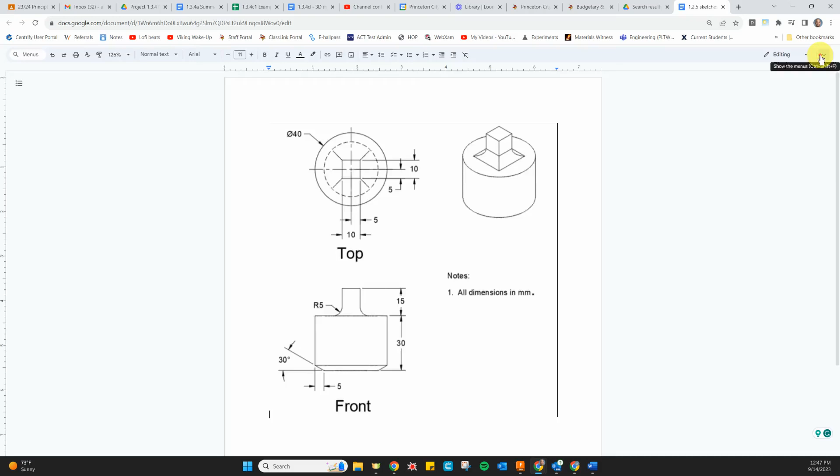Looking at this drawing, we're going to create this with Fusion 360. First, we'll sketch the circle portion and extrude it up a distance of 30 millimeters. So we're going to draw a circle of diameter 40 millimeters and extrude it up 30 millimeters. Let's get into it.

In Fusion 360, we're going to start a new sketch. I'm going to choose the tabletop because I'll be coming up with my extrusion. It really doesn't matter, you can do it from any dimension, but we're going to start in this flat dimension.

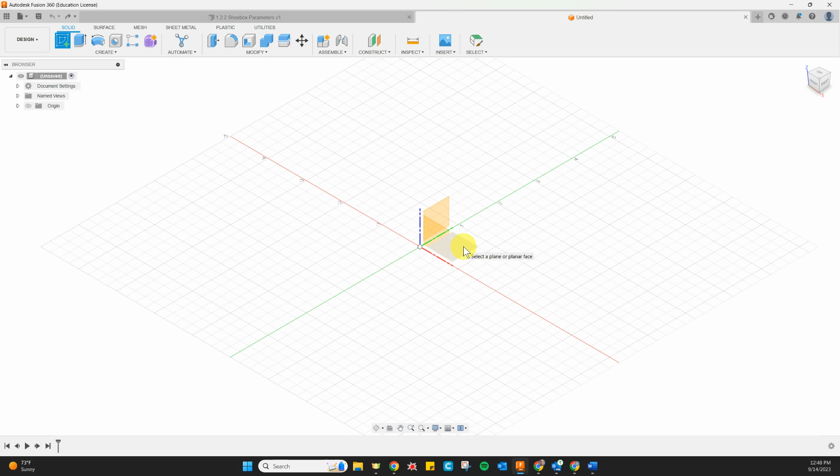We're going to start by making a center point circle. We click once in the center, move out, and I can specify a distance - oh look, it's got my units in inches right now. If you recall, our units are supposed to be in millimeters, so you might be telling yourself, I need to change the units.

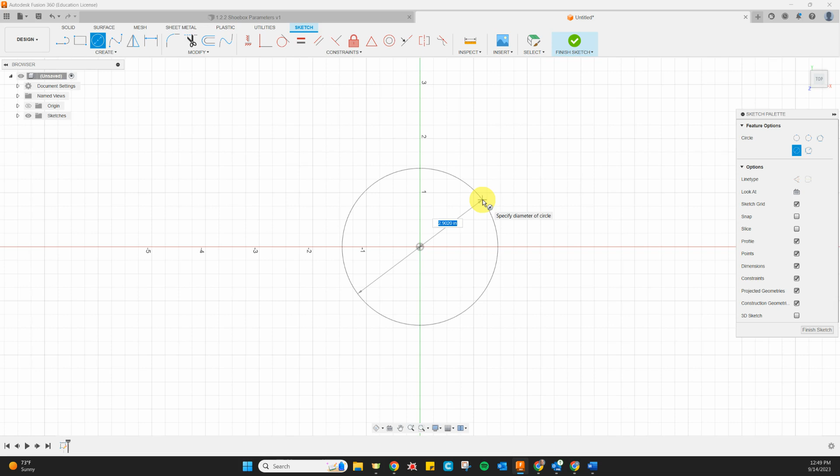To do that, I'm going over here to the document settings and expanding them. There it shows me my current units are, in fact, inches. We want to change that, don't we? We're going to change it from inches to millimeters. We don't want to set that as the default - I like inches being my normal default, so I'm going to say OK for now.

So now we're looking at it in millimeters. I'm going to create my circle once again, starting in the center, and come out a distance of 40 millimeters. That's what my drawing says.

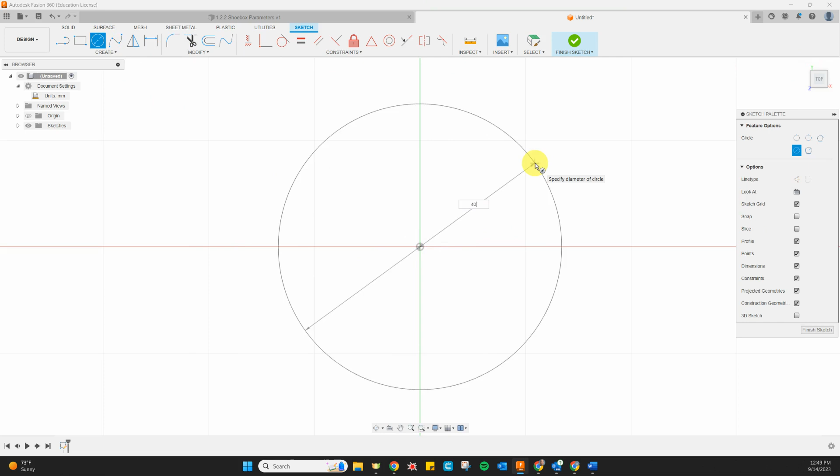Now you might be asking yourself, why are my blocks so big or so small, referring to the grid? Well, this is an adaptive grid - if I zoom in enough, it's not changing. You've got your grid settings down here, and right now my layout grid is not turned on. I'm not sure why it has a grid there, but that's okay, you can change all the grid settings right here.

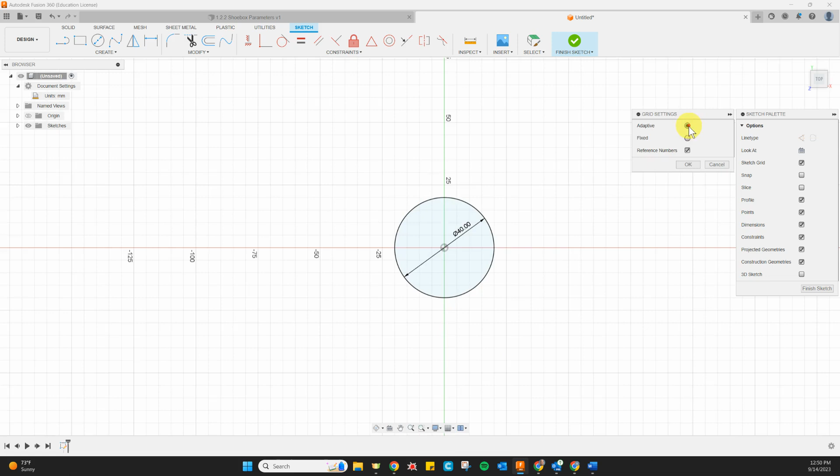There's the adaptive grid I was talking about - as you zoom in, they get smaller and smaller, and as you zoom out, they get larger and larger. So don't worry too much about that grid, it's just there to keep you oriented.

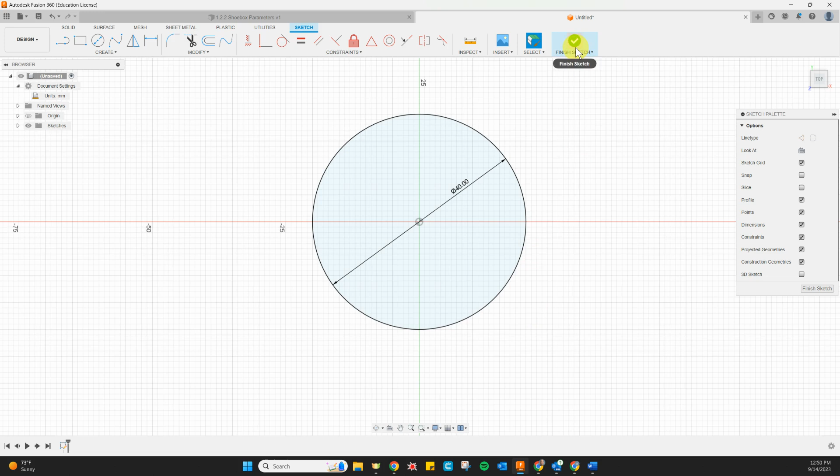I'll just cancel that. I really don't want my grid on right now, but I think you have to be in 3D mode to turn it off, so I'll go ahead and finish this sketch. Now I'm in 3D mode, and now I can go ahead and turn that grid off if I don't like it.

So now we've got our 40 millimeter circle, and we're ready to extrude it up. I think we set a distance of 30, so I'll go ahead and type in 30 there and press enter.

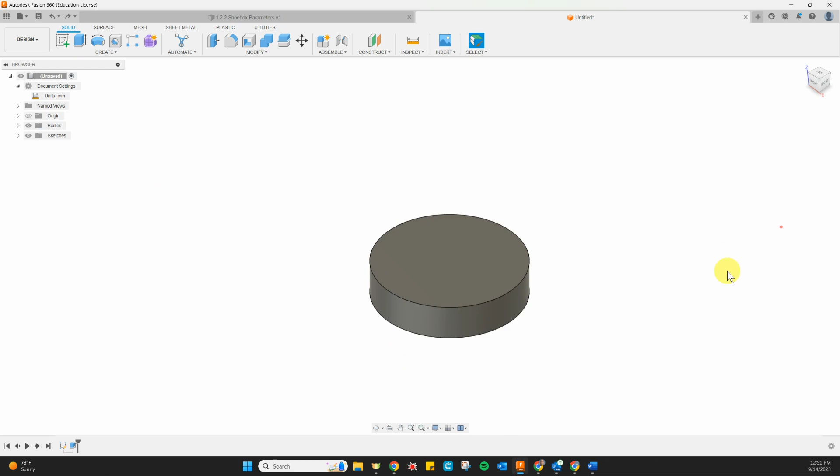Now let's say you did that and accidentally typed in the wrong number, or didn't type in a number at all. We can always go back and edit that extrusion right down here on our timeline. There's the original sketch - you can go in and fix it. If you meant for that to be 45 or 30, you could change it here.

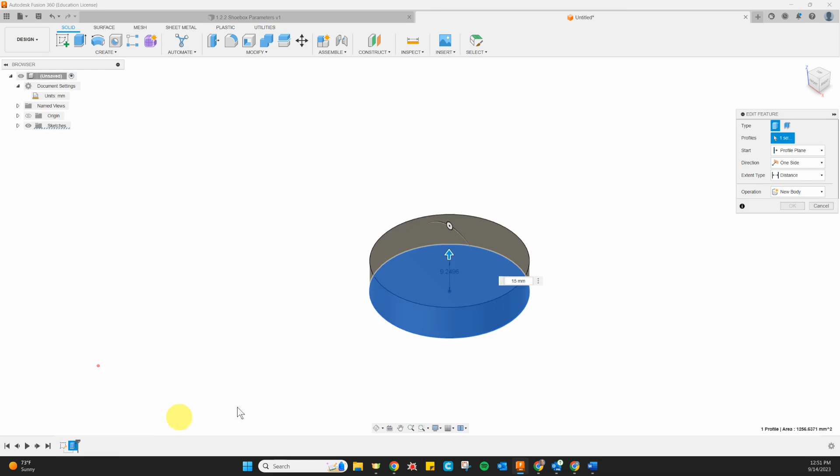We don't want to change ours. You can also change the depth of the extrusion by right-clicking on the timeline icon and hitting Edit Feature. We're going to drag it up, or just specify a height of 15. All right, so now we've got the base of our part.

It's done, almost. Now we're going to extrude this little cube up, straight up, and we're going to ignore the fact that it has some curved edges there - those are called fillets. We'll deal with those after we extrude the rectangle up.

Let's look at that rectangle. It is a square, and it does appear to be in the center. Over here, we can verify that the center of the square corresponds with the center of the outside circle. We know that because the distance from the edge of the square is 5 millimeters to the center, and the overall distance across the square is 10 millimeters tall and 10 millimeters wide. So therefore, it does line up with the center.

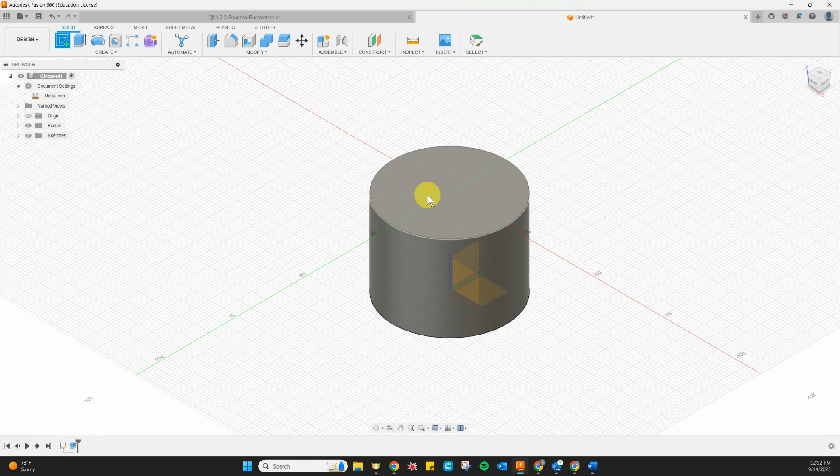Coming back to Fusion, we're going to sketch on the top. It's important here that you choose the top of the cylinder, not an origin plane back down on the tabletop. We're going to sketch on top of the cylinder. Select that as your drawing plane.

Now we'll use the rectangle tool. But here's the problem with this drawing tool: it wants you to do the two corners. There's a better tool for this job. If you look under the Create menu at Rectangles, which one of these options is better? Center rectangle, very good, thank you for that answer.

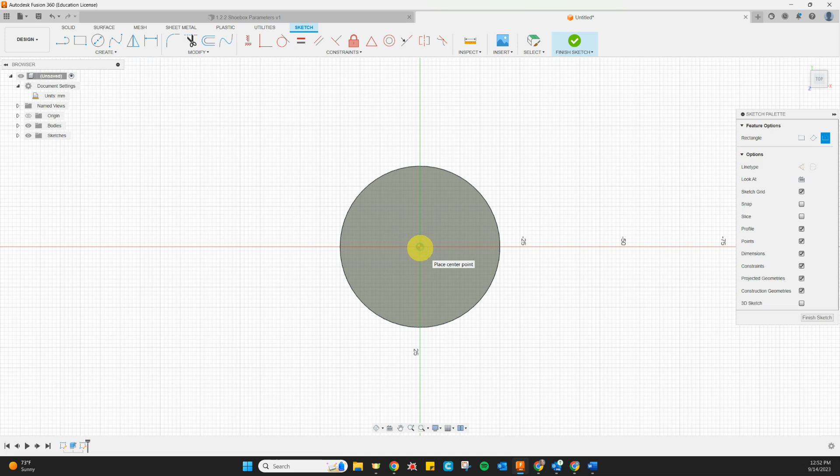We're going to choose the center rectangle, and the center point we want will be the center of the circle. So I'll click once to center that, then move up and over, and type in the width of 10. I'll press Tab to jump my cursor to the other box, type 10 again, and press Enter. There we go, there's our dimensions. We can finish our sketch.

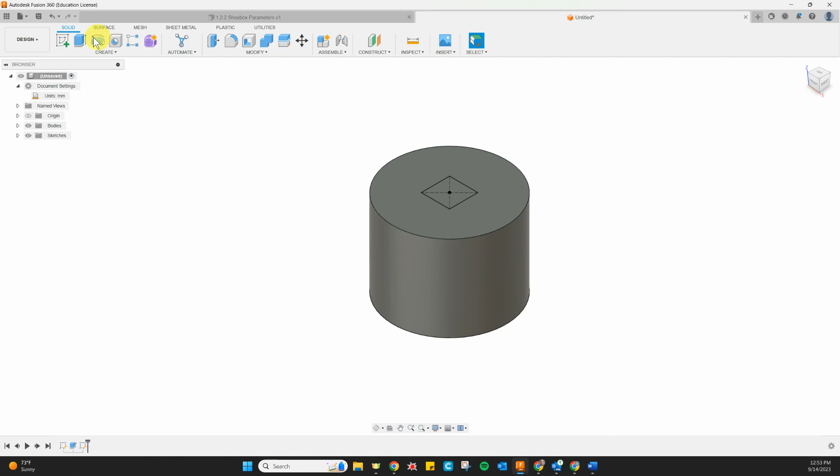We can extrude that part straight up. How far up do we need to extrude this? I'm not sure, so I'll flip over and look at my drawing. Our drawing says we need to go up a distance of 15 millimeters. So I'll type that in, 15 millimeters, enter.

Looking good. What should we focus on next? Should we focus on the little curve filled in right here? That's called a fillet, and it has a radius. It's an arc, arcing tangentially between the vertical face and the horizontal face, and it happens to have a radius of 5. R5 means that is the radius of that curve.

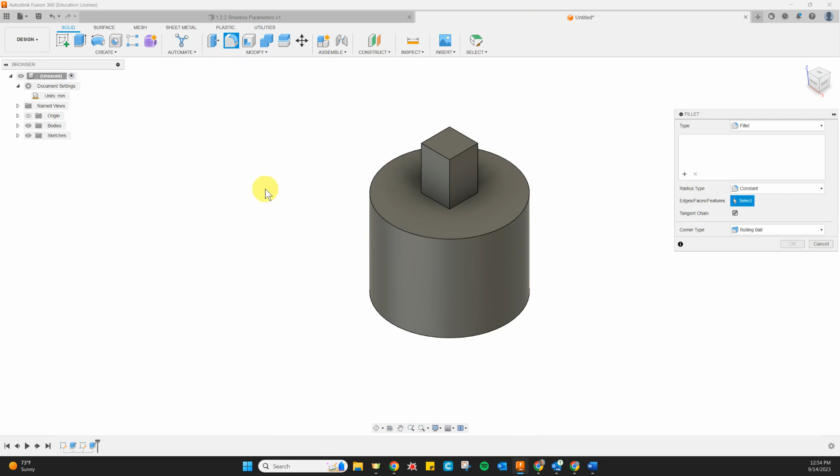So let's apply a fillet. To do a fillet, it's the fillet tool, which ironically shows a round. Let's click that, and it'll say select your edges. We want the edge right here, and the edge right here. We can actually grab through this surface if we get the right spot, and there's another one. We want those 4 edges, and we can pull this out and change our radius.

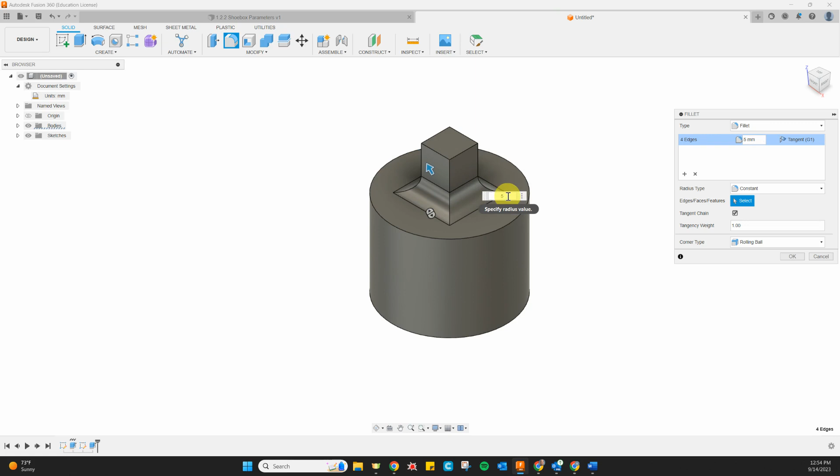You can see it just gets bigger and smaller, but the value we want to put on there is 5, we said. Enter. It looks great.

Last thing that we want to do, we've got all the features on top done. Last thing is to add this little chamfer, a little chop down on the bottom. This one threw us for a loop yesterday a bit, but we figured it out. I'm going to look at this thing from the bottom, so I'll drag my view cube just a bit like that.

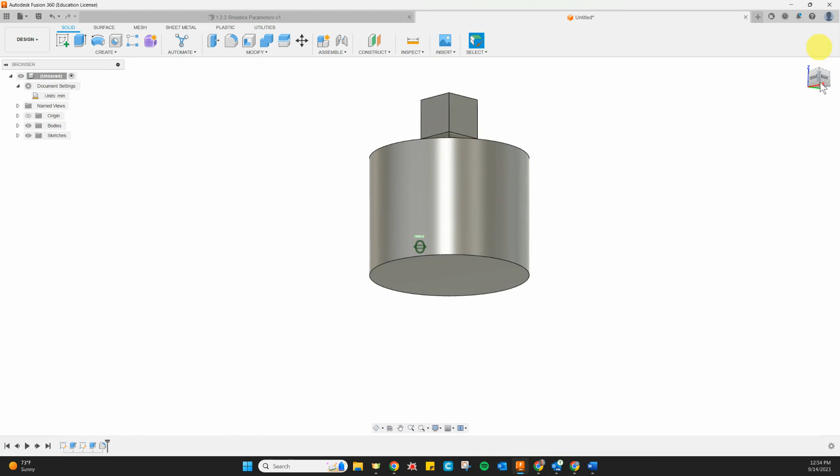Fillet is up here in the shortcuts for modify, but if we choose modify there are even more options down here, and chamfer is one of them. Now yesterday we chose our edge to be right here, but that didn't work out so well for us. So we circled back and tried it a different way. It says the pop-up on the mouse says select edges or faces. So we're actually going to chamfer this face, is what we're chamfering.

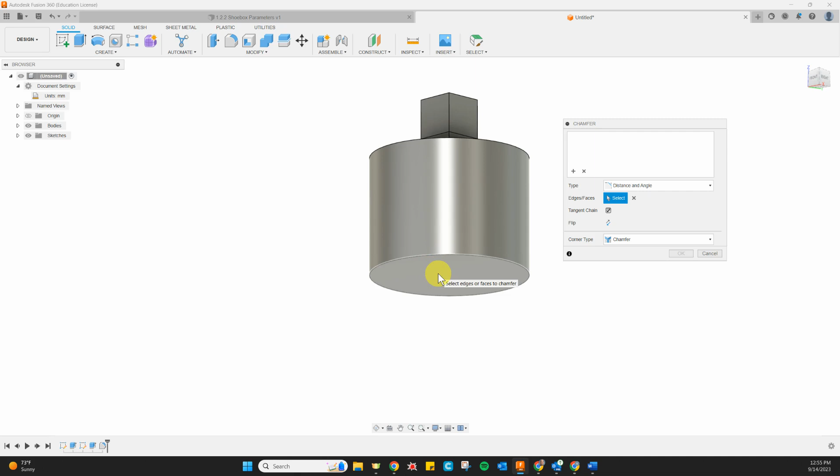Now it's looking for, you can see the little blue arrow. If I move that little blue arrow, it starts chamfering like that, and it's asking for a distance. So let's see what our distance is. Looks like our distance is supposed to be 5.

And look here, for the other side, it's an angle. So what you might have to do is change the type of chamfer. Maybe yours is set to equal distance. We want a distance and an angle.

So now with distance and angle selected, let's type in our distance and our angle. Our distance being... I forgot how much it said already. Our distance being 5 and our angle being 30. So distance being 5, tab, angle being 30. And that does look like what we're looking for.

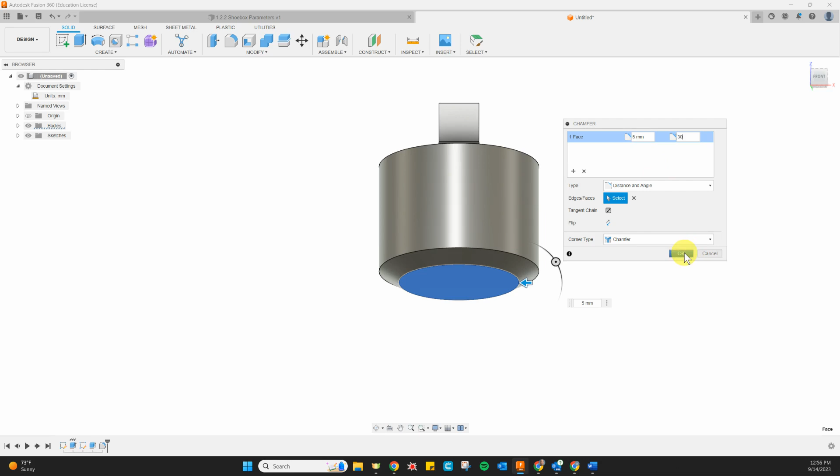So I'll click OK. I'll look at this from the front, from the home view. That does line up with what we're looking for. So we'll go on to the next portion of the video next.